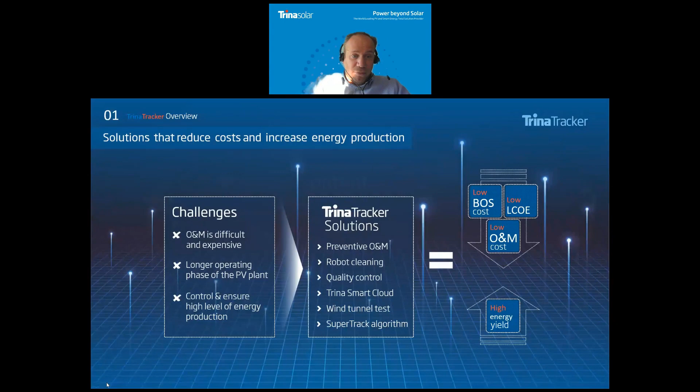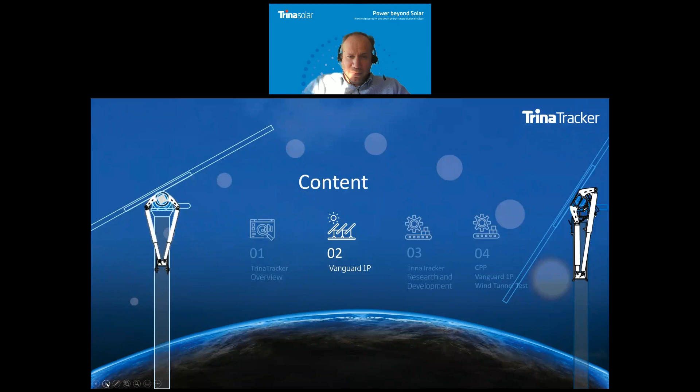It's a pleasure for me to introduce you this amazing new product, Vanguard 1P. Not only because of the exceptional technical results as an innovative element and product, but also because it is the result of very hard work by a brilliant group of colleagues from several departments over the last several months. Okay, let's go. Next slide, please.

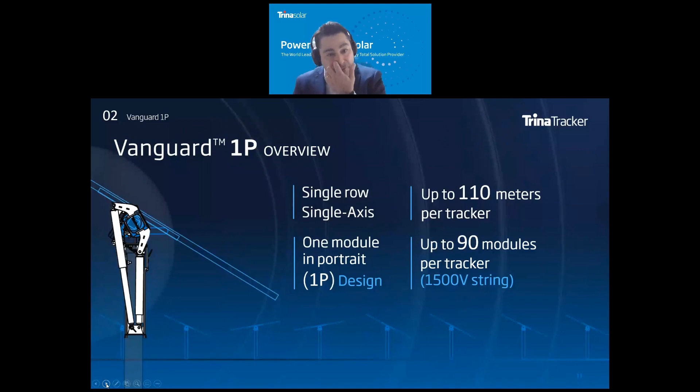Vanguard 1P is a tracker with a configuration of one single row. This tracker is capable of supporting 3 strings with the small modules and 2 strings with our high power modules. The maximum length we can reach is 110 meters. And the relevant thing is that we are flexible not only to assemble our actual high power modules, but also the bigger ones that I'm sure are coming. Okay, so this is the real design, not for now, but for the near future. Next slide, please.

Here you can see the main components of the single line tracker. We are equipping this tracker with some of the features or elements that are classical in our other designs, like for instance the Trina clamp that allows you to be 2 times more efficient in the installation, or the spherical bearing design that allows you to have high adjustability. I will give you more details later on.

But at the same time, we are including innovations in this tracker. The most important one is the torque tube design. We are considering the rounded edge tube profile that allows us to reach long spans and, of course, high loads, and allows us to install this tracker in the landscape that represents the focus of the design, which is huge projects, the bigger projects in the market.

Okay. Another relevant innovation is the use of dual dampers that allow us to increase the system's damping and the performance against the wind. And of course, the most important thing that is directly related to the cost is the option to have a reduced number of piles per megawatt. This is something really interesting, and I will give you more details. Okay.

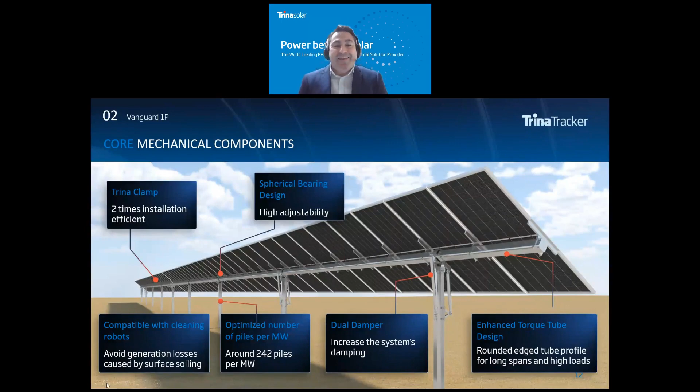I'm going to talk first about the traditional innovations from the company. This spherical bearing is a patented solution. We are comparing this with the traditional cylindrical bearing used by other competitors. We use a self-lubricating technical plastic. This is the black part you can see in the picture on the left. We tested the resistance to solar degradation with an accelerated life test of more than 15 years.

And the most relevant improvement of the installation of this spherical bearing is that it avoids the need for calibration during the installation process, because it increases the tolerances for installing the torque tube over the piles. At the same time, this minimizes the structural stress in the deformation, because you can install the torque tube and the pile even with higher tolerance, but without increasing the stress in an abnormal way.

And the third one is important because it enables you to increase the ramming tolerance, and directly you increase the percentage of rammed piles. Why? Because when you have a soil that is harder than expected, in some cases the pile can be out of tolerance after ramming. If you have higher tolerance to install the bearing, of course you are going to have, as a result, a valid ramming.

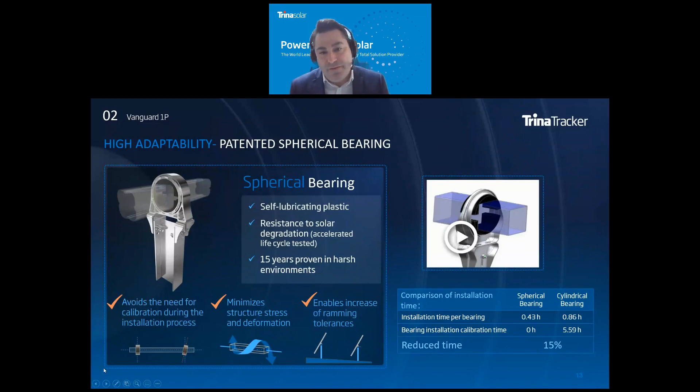On the right side, you have an animation where you can perfectly understand how this bearing works. This is turning 360 degrees, and this allows the torque tube to work properly, even with real misalignment with the piles. At the same time, this is relevant because it allows us to reduce the assembly time for this piece compared with the cylindrical one by up to 15%. Again, this is a traditional solution, and I think this is a good step forward to go deeper.

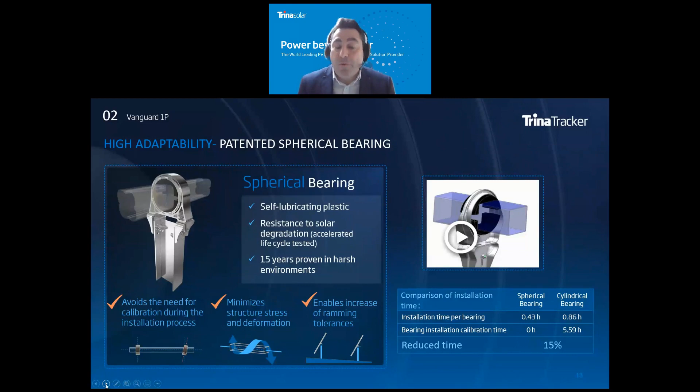Okay. Thank you. Please, next slide.

This is one of the most important innovations, the use of angle torque tubes. If we compare the angle torque tube 130 by 130 with the standard 120 millimeter square torque tube, we can see, going to the numbers, that the bending resistance is increased by 12.4%. The torsion resistance has been increased by 29.6%. This is really significant.

And both improvements allow you to reduce the number of piles by around 12% and go to longer trackers. This is relevant, and this torque tube has been designed specifically for this tracker, which has been designed to be the best solution for a huge landscape.

Okay, please, next slide.

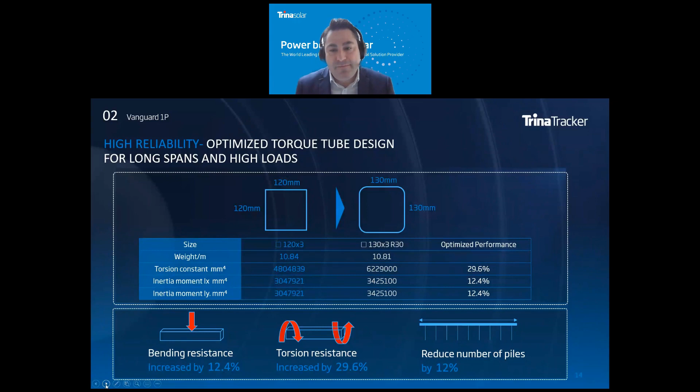So the summary is, by using this dual damper, you increase the damping ratio, reduce the dynamic amplification factor, and at the end of the day, you have a high gust wind resistance in all directions.

Okay, please, next slide.

Again, trackers are flexible structures even with frequencies higher than 1 Hz. They're supposed to be rigid, but it's important to check not only the usual structural verification with static analysis, but also the aeroelastic analysis. And we work in that direction in all our products, as part of our product development procedure that will be explained in detail by my colleague Juanma later on.

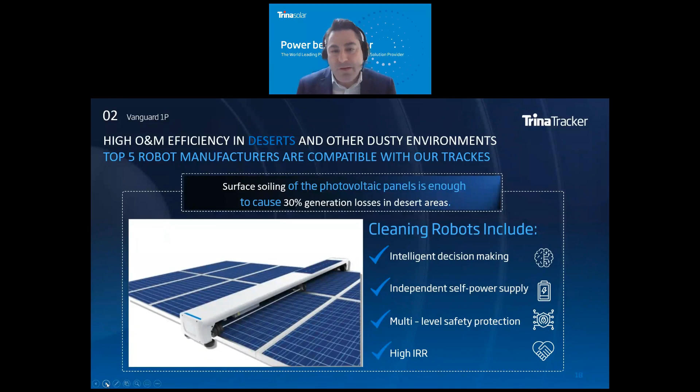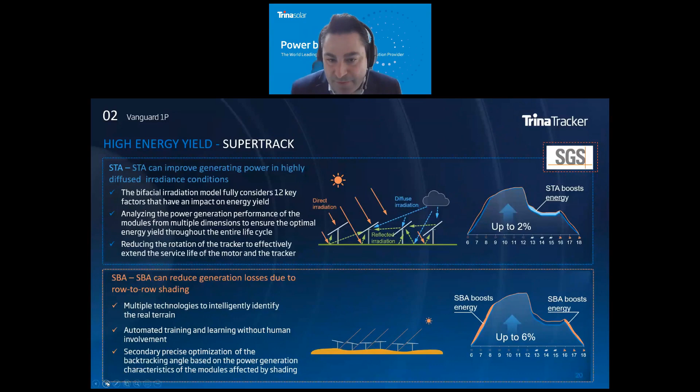Okay. The second module is, please go back to the previous. Exactly. The second module is the smart backtracking. This is relevant for the first hours of the day and the last hours of the day. And this is allowing you to consider what is the location of every tracker in the terrain, and allow you to avoid any shadows in between trackers, even considering the slopes, the difference in the slope between trackers, and all the elements that we can consider for these estimations. This is relevant when you have slopey plants, for instance, and you can uplift the production up to 6%. So this is very significant.

And in this case, we are considering with both modules not the traditional 4 inputs that the astronomical algorithm used to make this tracking system. We are considering 12 parameters, not only 4. So this allows us, together with the development of our internal algorithms, to boost the production of the plant. Okay, please, next slide.

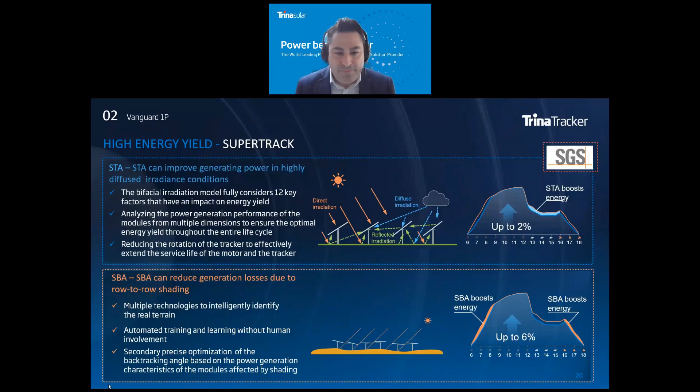So the summary of both modules that work together can reach a value of up to 8%, 8.1%. This is a really amazing value in gain. This is the gain in production along all the year, okay? So this is the real situation for a project when you are optimizing the capabilities of these modules. For instance, a project that has a high diffuse irradiance ratio, you have a lot of cloudy days, you have a complex topography like we have, for instance, in Europe, in many places. This is boosting the performance, okay? These modules, SuperTrack is boosting the performance of the plant. Okay, next slide, please.

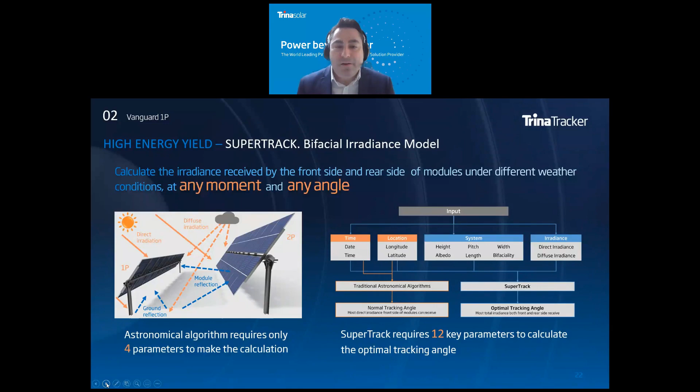Here you can see on the right side, just in orange, the 4 parameters that used to be considered by the astronomical standard algorithm, and the 12 parameters are these 4 plus the other 8 parameters you can see on the right side that are used by the SuperTrack to get the optimal tracking angle. Okay, this is completely different, and even in some cases we define that we can absorb or consent some shadow in the tracker or in a part of the module in order to get a higher production from the backside. So this is really amazing. Okay, it's a completely different way to track the sun in order to boost the production of the plant. Okay, next slide, please.

Let me summarize in a quick way what this Vanguard 1P new product represents. High reliability coming from the use of dual damper design, a stronger torque tube design, and collaboration with our partner CPP in order to check, analyze, do new tests and put new hypotheses related to the wind tunnel test. We are reaching a high O&M efficiency by including the main cleaning robot solutions in the market, and by working with our Trina Smart Cloud solution that allows you to monitor not only the trackers but the rest of the components. It's a decision of the customer.

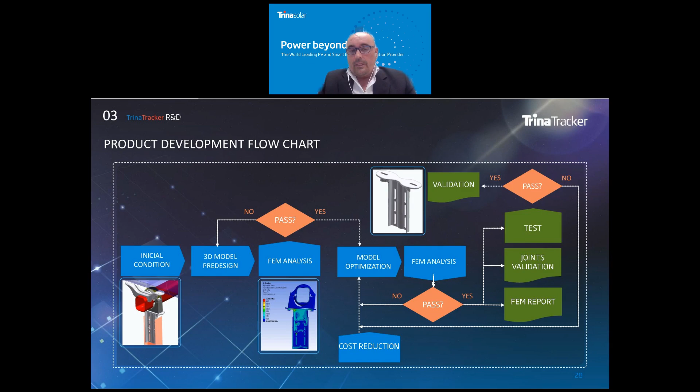Okay, so these are some of the pictures that we get from the development of our Vanguard 1P. As you can check in this first slide, in the bottom left, you can see that we start with the standards information for the calculation and with the tool that CPP is providing to us, which is the wind tunnel test information. This contains the coefficients or the instability velocities that we have to use in the development of these trackers. Then with this information, the first thing we do is these calculations, as I mentioned before.

All of them are tested mechanically and dynamically, doing a complete analysis of the deformation that we obtain in the test and the real performance of these parts under the forces they have to be submitted to. And at the end, we also build the complete tracker. We need to build a complete solution to analyze how all these parts are going to work together. These complete tests are used to obtain information like consumptions, loads, and instability in some cases. We have to check that the complete solution, not only each of the parts, is working perfectly and according to the specifications.

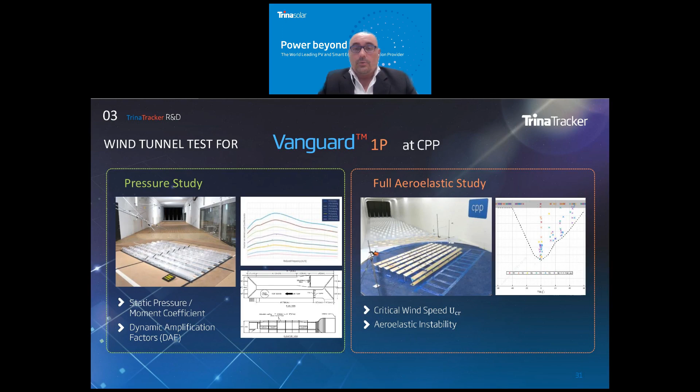The main result from this test is the critical speed curve, which allows us to define the stow position and the maximum speed that our tracker can withstand without these instabilities. So this is a very important tool for our development.

So we are not just stopping at the normal test. We are doing additional studies to analyze all the conditions that we can find in the facilities. It could be larger tilts, up to 75 degrees. Here we also have different exposure, like D terrain instead of the traditional C terrain. And we are also doing additional slopes, like a 15% slope.

Okay, as mentioned before, one important thing in our development is always the test. So we can see here that we do a lot of different tests. You can see here some of them, not all of them, because there are many we can include. But we are doing high load tests first of all. This is a test which is focused on obtaining the deformation, the maximum load that the system can withstand without breaks, without deformations, and so on.

Then we have fatigue and dynamic tests. This is also very important nowadays. Normally the design before was done going to the yield point and seeing when we have plastic deformation. But fatigue is very important, and dynamic tests are important, because we can also have some problems coming from the accumulated damage that can happen with stresses that are under the yield point. So we can calculate in this way how long our parts will survive.

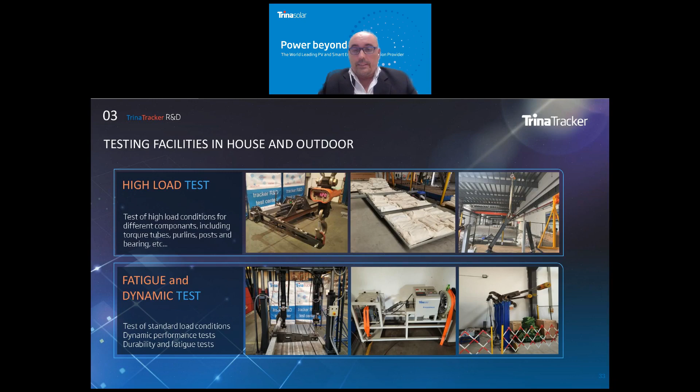We can also do some additional tests like salt spray fog tests or other tests. As mentioned, there are many more, but I don't have all of them here, obviously. And these are some other tests which are, in my opinion, very important for us, which is the whole assembly test. We have in our facility some areas to test our trackers completely before they are put on the market. So here we test the slope conditions, how the system is working with different slopes.

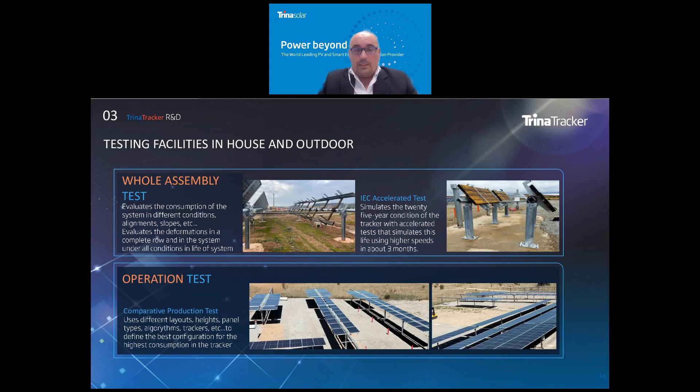We also test the consumption. We are also doing the IEC accelerated test, and some other different things that you can only do on the field and not only in specific parts. And as mentioned, an important test is always the operation test. That includes things like the communication of the TCUs and NCU and everything, to be completely sure that our system is reliable enough to be installed on field without problems. So this is a very important point for our test.

And as a result of the work of the research and development team, one of the important things is that we have more than 20 patents and utility models related to tracker technologies in the market, and we are still working on some more. So this is a very active part of the company, which has a lot of support and resources from Trina, and this is a very important part of the design.

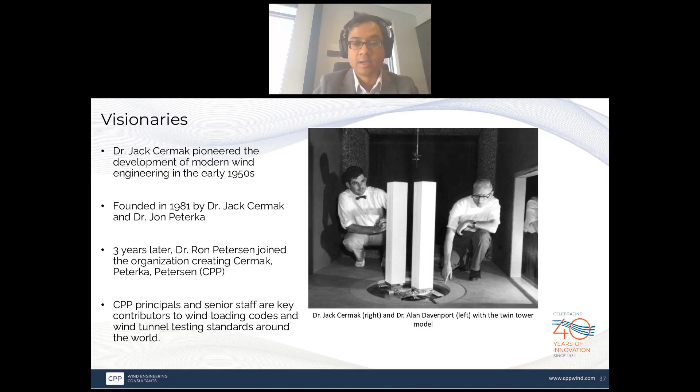Here in this photo on your right, you can see Dr. Jack Cermak on the right and Dr. Alan Davenport from Western University, Canada on the left with the famous Twin Tower model in the wind tunnel. An interesting fact: Dr. Cermak and Dr. Davenport first came up with the term wind engineering, and it used to be known as industrial aerodynamics prior to that.

So our headquarters in Windsor, Colorado is home to our 2 brand new state-of-the-art boundary layer wind tunnels. Our 3rd wind tunnel is in Sydney, Australia. We have offices all around the world. And with 40 years of experience and over 4,500 projects worldwide, CPP is the largest and most experienced wind engineering consulting firm in the US.

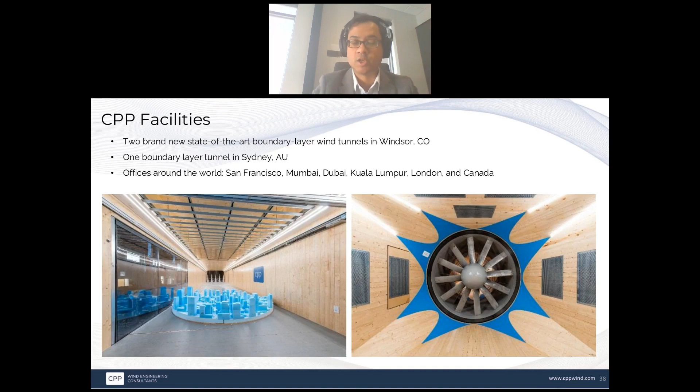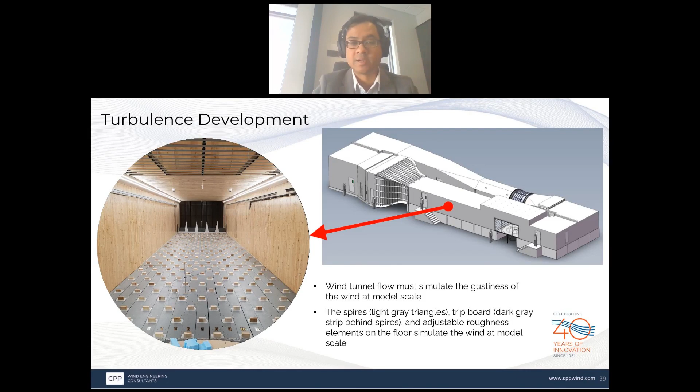So moving on to our solar services, CPP started looking into ground-mounted solar somewhere in the middle of the 2000s. And after doing several projects, we realized that there are quite a few parameters that are somewhat similar across different systems. So then we started building our own database.

So at this point, we have tested hundreds of different configurations, looking into different ground coverage ratios, different tracker heights, different tilts, and different wind directions. Literally, we have collected billions and billions of data points with these hundreds of different configurations at this point.

One of our newest additions to the database is our topographic database. So now we can provide a recommendation on how to adjust the load coefficients when the trackers are placed on a hill or a topography. This database has been very popular among our clients because it can save a lot of time and money when it comes to a very generic tracker structure.

Aside from the rigid model test or our rigid model database, we also provide services related to aeroelastic instability. By aeroelastic instability, we don't mean just any type of deflection. Aeroelastic instability pertains to continuous cyclic motion that grows into larger motion, or a sudden motion that is tied to a specific peak-to-peak deflection, for example, 20-degree or 30-degree peak-to-peak deflections.

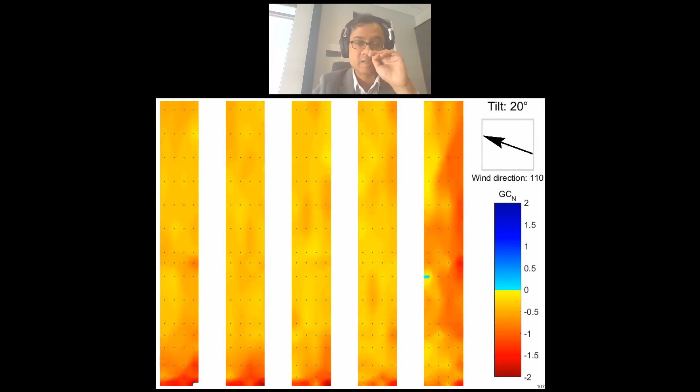Here is an example of what we get out of our rigid model study. In this particular example, we have the wind coming from the southeast direction, so the bottom right corner of your screen. As you can see, for this case the trackers are facing west, so this is an uplift condition. And as you can see, the first row is getting hammered. We have higher pressures on the first row, dropping towards the interior rows, and we also have higher pressure coefficients towards the corners of the trackers.

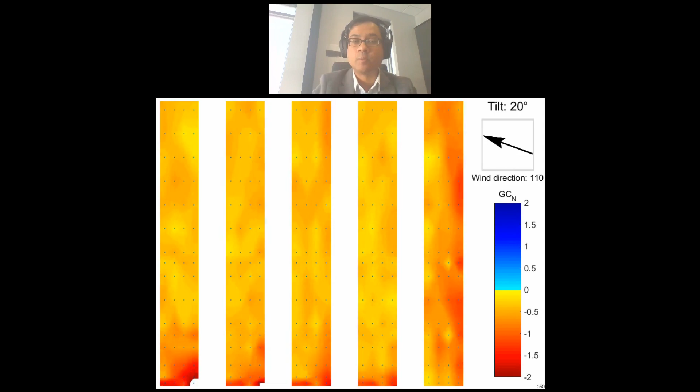So as you can see here, this is showing the fluctuating nature of the flow. And with this type of information, we can not only get the load coefficients for larger tributary areas, such as a tracker wing or a post tributary area, we can also get load coefficients for the smallest components of the structure, such as the clips or clamps that hold the modules to the rails.

On the other hand, for the moderate or high tilt instability, what we call the vortex lock-in, we get the vortices shedding off from the leading and trailing edge of the module, and again, the alternating nature of the shedding of those vortices can create the unstable nature of the trackers. And if the tracker is moving a lot and passing towards the horizontal tilt line, the vortex lock-in can turn into torsional divergence.

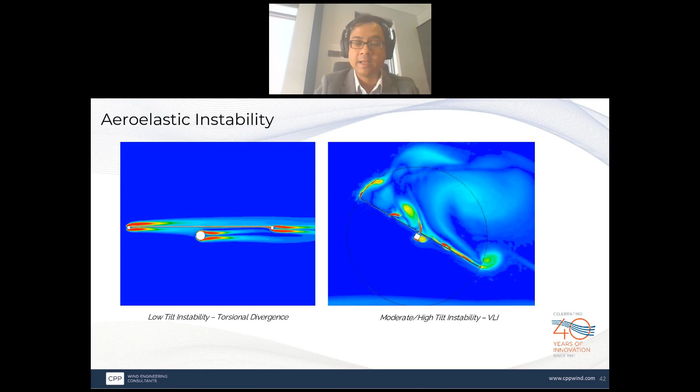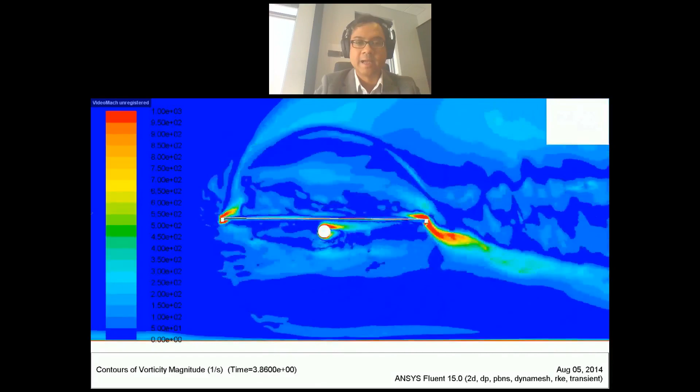Let's take a look at the torsional divergence videos now. Here you can see the vortex is forming at the leading edge, on the upper side and the lower side, and it's making the trackers violently unstable. We can now take a look at the other instability, the vortex lock-in. Here you will see the vortices are forming on the leading and trailing edge of the panel and eventually making the tracker unstable.

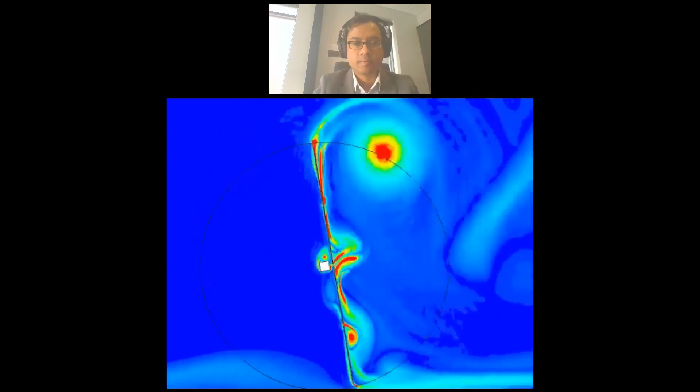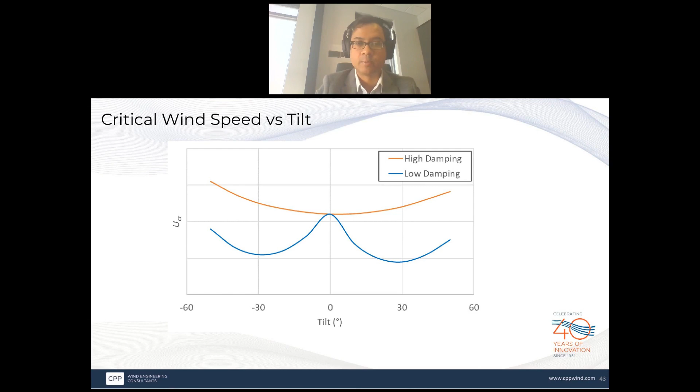So the blue curve, which is of the W shape, is for a low damping system, where the wind speed decreases from 0° tilt, and then it rises back up at the higher tilt. On the other hand, for the high damping, where we have the effect of the damping on the moderate to high tilt, you can see that the critical wind speed is increasing as we are moving away from the 0° tilt.

So for Trina, we have performed static and dynamic analysis based on our database. And with this type of study, we were able to provide design load coefficients to design different structural components of the Trina Solar tracker system. And in addition to looking at the results from flat topography, we have also provided adjustment factors for load coefficients for solar trackers on a hill or on a topography for Trina.

We have also performed a full 3D aeroelastic wind tunnel test for Trina. So full 3D aeroelastic wind tunnel testing has several advantages over section model testing. One, with a full 3D aeroelastic test, we can look into the effect of cornering winds, and more often than not, we have seen that the cornering wind can dictate the critical wind speed compared to a head-on or straight wind.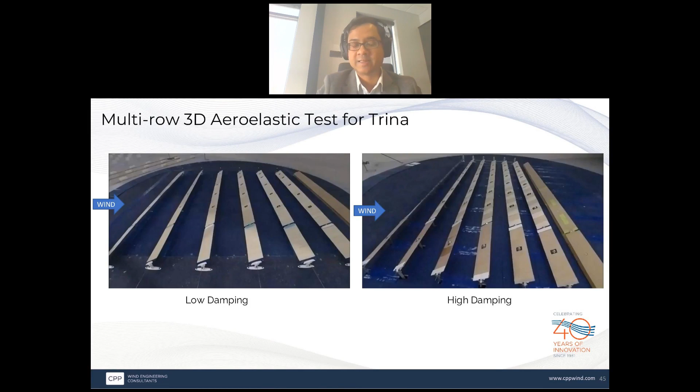The second point is with a full 3D aeroelastic wind tunnel test, we can also take a look at the row-to-row interaction. In many cases, we have seen that the first row, or the upwind perimeter row, is moving very little, but that very little movement on the first perimeter row is cascading down towards the interior rows, causing the instability at the interior rows. So here I have a couple of videos to show the effect of damping.

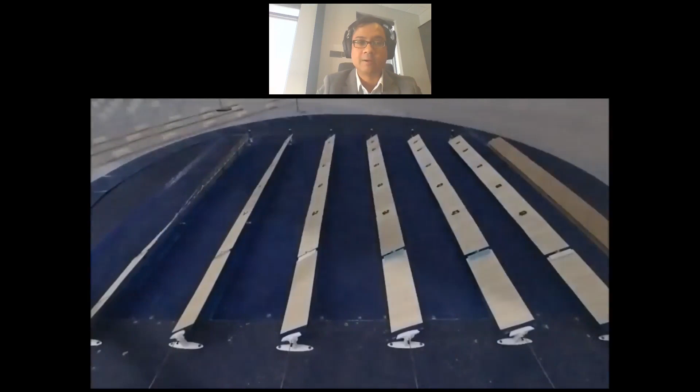So this first video shows the system without the damper. And as you can see here, the first row is becoming violently unstable, and the motion is also cascading down towards inner rows. On the other hand, the second video is the system with high damping. And you can barely see any movement because the system was stable up to the top tunnel speed. Moving on.

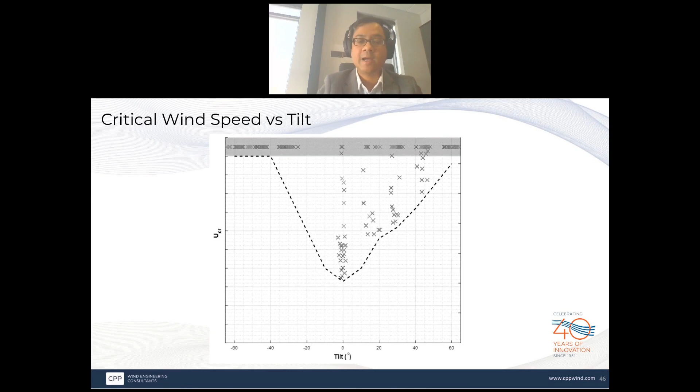So with that, I would like to conclude my presentation. I would be happy to answer any questions you have. And over to you, Tim.